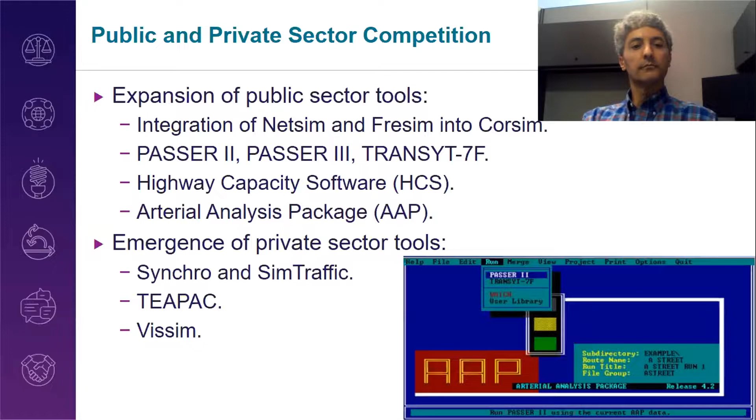All right, so the Highway Capacity Manual was quite a big deal in the 1990s. We started to see many research articles comparing HCM results to simulation results. And I recall it being a fairly big deal when the TRB Highway Capacity Committee updated its control delay equation based on research results involving thousands of NetSim simulation runs. And this was a big deal because the control delay equation was the primary determining factor for level of service, and level of service in turn was the primary determining factor for many of the important decisions made by agencies.

Therefore, simulation and capacity analysis sort of had a mutual impact on each other, and the comparisons between the two helped to improve the robustness of performance measures and equations and modeling approaches in both forms of tools, and essentially served as sort of an early form of multi-resolution modeling. Researchers began to notice that they could use vehicle trajectories to compare the results of multiple simulation tools, and to compute performance measures according to the published HCM definitions.

You had folks like Ken Courage and Rick Dowling who helped to publish an interesting chapter in the Highway Capacity Manual to help analysts understand what was under the hood of the performance measures they were seeing from the software tools.

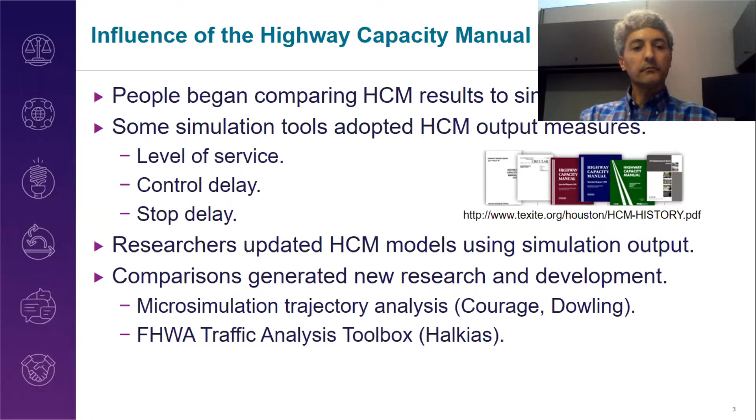I believe it was approximately the year 1995 when I attended a NetSim training course in South Florida with instructors such as Susan Walker and Ku Lee and Amar Kanan from Kaman Sciences. And I recall that Susan was the lead instructor, and she showed the trainees how to change the random number seed.

Most people have never heard of a random number seed. Then she showed how the results from the model would change after people changed the random number seed. And frankly, this caused grown adults and certified professional engineers who actually had decades of experience to sort of freak out a little bit. They were like, whoa, wait a minute. How can we even trust this model? Which model result is the correct result?

And so I think what Susan Walker did was she advised everyone to perform multiple runs, for example, 10 runs or so, and to just take the average of those results. And so that seems like a scientific data-driven approach is how they were trying to portray that. So I think the training course participants mostly got the point, but at the same time, I think everyone's faith in the model was sort of shaken because everyone was accustomed to the Highway Capacity Software and other deterministic tools that always would give one and only one true result.

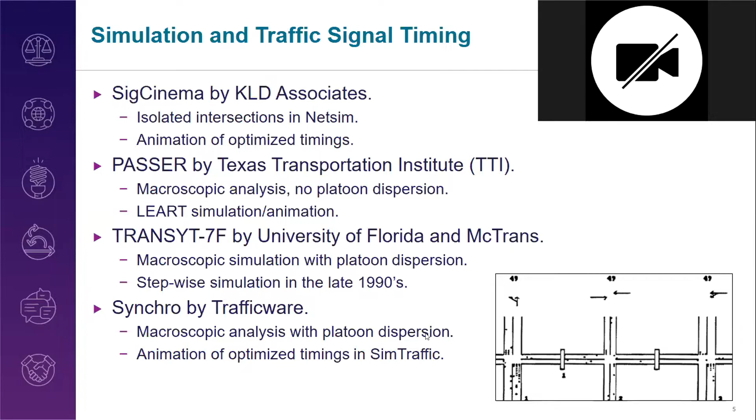All right, yeah, thanks. Go ahead, Tom Creasey. Yeah, without this sounding like a software advertisement, I just wanted to say that regarding the topic of regional microsimulation, that tool does exist. At least one exists right now and has been done, a regional microsimulation employing dynamic traffic assignment. We've done that with our TransModeler software, but that does exist now. And maybe Chris, that's a future demonstration topic.

Yeah, absolutely. So there's some really strong R&D going in multiple directions, and so people have got some great options to choose from. So I think it'll be real interesting to see what happens over the next 10 years and what becomes dominant, or if they become sort of equal options. But it's great that some companies are really putting some serious intensive development into that option. I think the user community can only benefit from having that kind of an option.

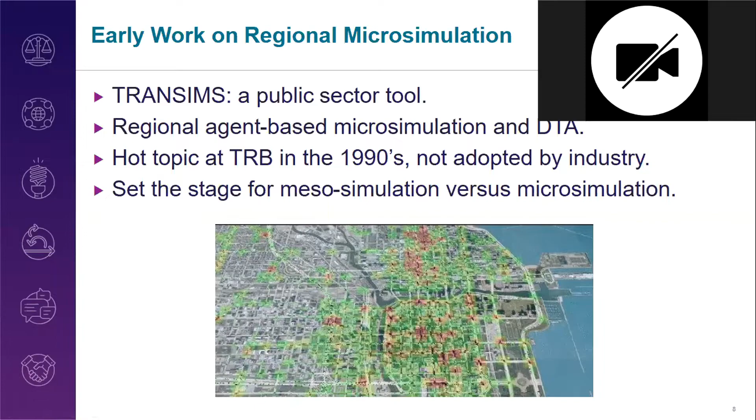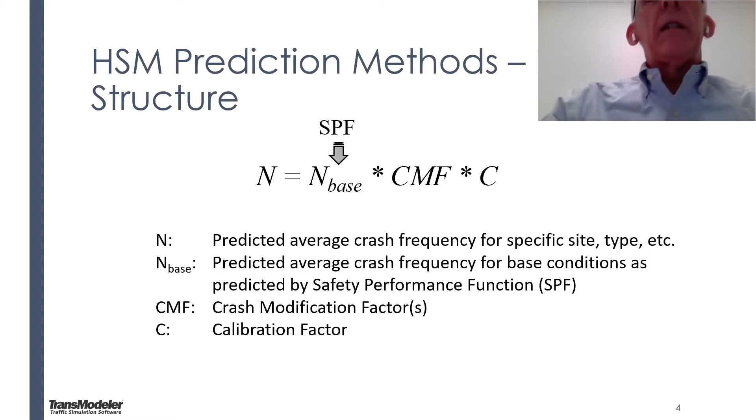And then this base number is adjusted by crash modification factors, which account for things like road width, presence or absence of a barrier, a number of different factors. And then also there's a calibration factor. You may think of it maybe as a fudge factor. And if the numbers don't quite agree with data that you have, agencies can have their own calibration factors. So that's the basic form of it.

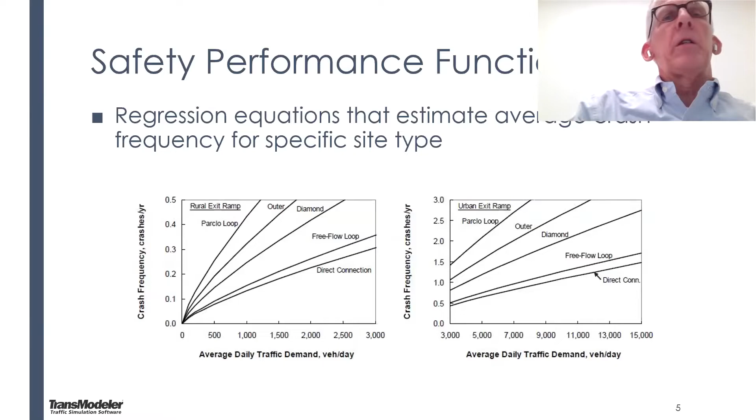These safety performance functions are typically regression equations based on data. And if you read through the HSM or even the research supporting that, you'll find a ton of these safety performance functions, but they're typically regression equations that estimate the average crash frequency for specific site types. So the methodology is basically that. It applies a safety performance function, then applies crash modification factors and calibration factors to predict this annual number of crashes. Then there's one more step, and that is, do you have historical crash data available?

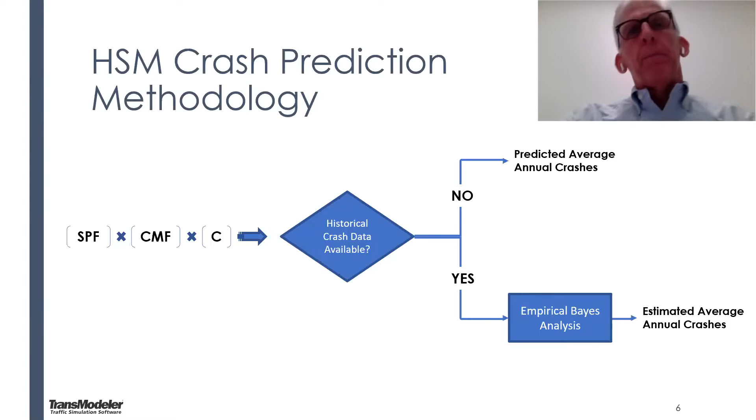If the answer to that question is no, then the result is just what they call predicted average annual crashes. If there are crash data available, then it takes it to another step and applies an empirical Bayes analysis, which is really a fancy way of saying a weighted average between the prediction that's made as a result of the safety performance function and the crash data to give you this estimated annual crashes. So basically what that means is you can refine your prediction if you have historical crash data to go into it.

So after the HSM was published, as you would expect, there were a few software tools that began to show up: IHSDM, McTrans's highway safety software, and some customized spreadsheets. So maybe some of you have had some experience with the Interactive Highway Safety Design Model, or IHSDM. If you have, you know that it was written in some very late 1990s looking Java code using this grid or tabular format, and included wonderful things like horizontal and vertical stationing for your roadway project. So you have to go to your design plans and actually get this centerline stationing.

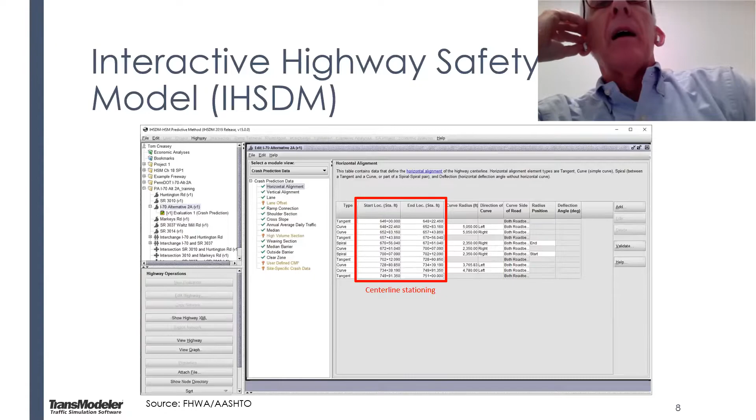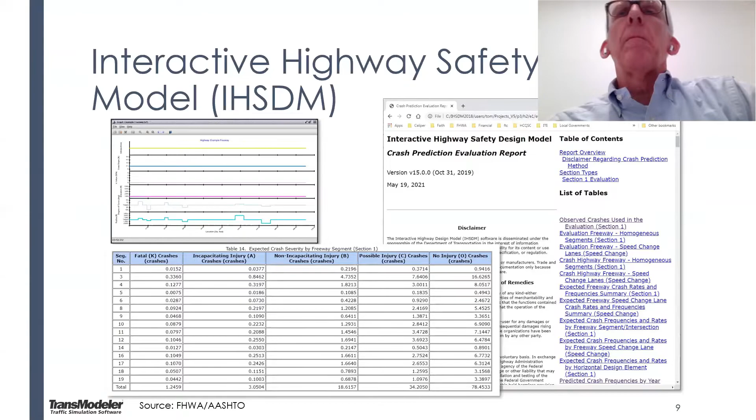Not terribly user-friendly, but functional. As you would expect for something like that, the graphics were also equally unimpressive. As you can see in this little picture here, the results are in an HTML type of table that you could use as it was, but if you wanted to do anything else with it, you had to copy and paste it into a spreadsheet. So again, functional, not terribly attractive or pleasing to the eye, but certainly it worked.

There's improvement to that through the highway safety software, which is bundled with HCS. But again, it's the same type of tabular format. The results certainly look better in the report, but again, some of the same constraints as if you used IHSDM.

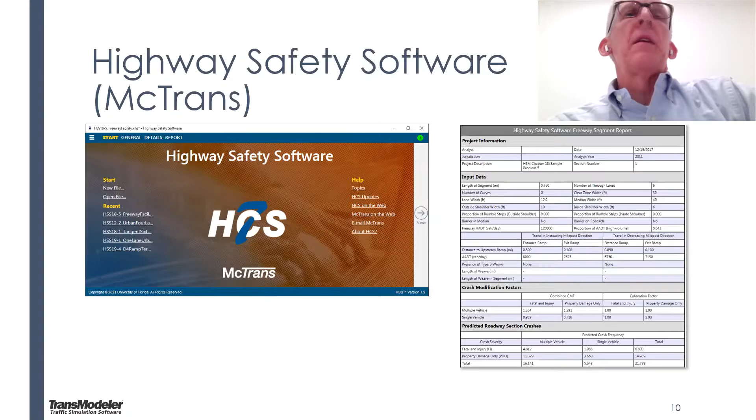And then AASHTO, that had produced the HSM, also produced some spreadsheets. Some states like Ohio took those spreadsheets and went to great lengths to customize those, and could do some other things like making some nice looking bar charts, stacked bar charts, and other things to go with that. But I think we've all had experience with spreadsheets to the point that they have lots of links in there and therefore opportunities for something to get broken and go wrong. So there's always the danger of that happening in using that type of tool.

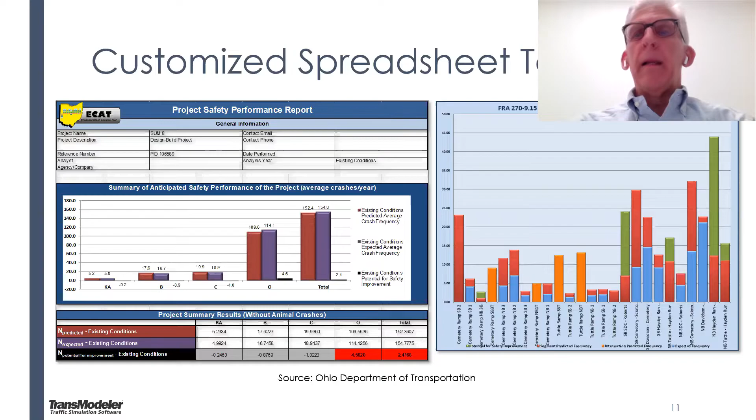So Ohio is one of the states that has committed to using our TransModeler simulation software and said, can you actually add these HSM methods to your simulation software? And we said, we'll go talk about it and we'll get back with you. And part of our discussion was, well, we've never really done this before. In fact, we don't know of anybody that's added safety prediction methods to simulation software.

Then the question is, within our software, what do we use and what do we not use? How much of the input should be auto-identified after the network is created, and what should we leave for the users to input? What should that user interface look like? How do we make it transparent enough so that agencies can customize it through things like calibration factors, severity distributions, or even maybe adding their own crash modification factors?

On the plus side of it, we definitely saw benefits of having one tool used for multiple purposes. So not only could you do simulation as part of project development, but also then use it for safety analysis. TransModeler is a GIS. So being able to take advantage of the GIS functionality that's built into the software already, particularly the roadway geometry in creating your network, but also taking advantage of other spatially referenced data that just about every state agency maintains now, things like where your guardrails are located, pavement surface type, road width, whatever.

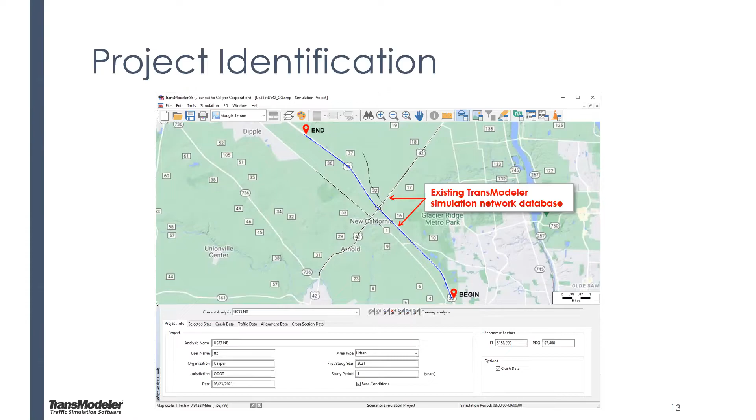Anywhere you have a network connection within TransModeler, you have a choice among several background maps. But it simply begins by selecting the beginning and the ending point of your section to be analyzed, and then from there putting it into a tabular form, and that's what you see here. So once the site has been selected, then it divides it up. This is a freeway segment, so dividing it up between basic segments and speed change lanes. And then every one of these pieces is a row in the table, if you will.

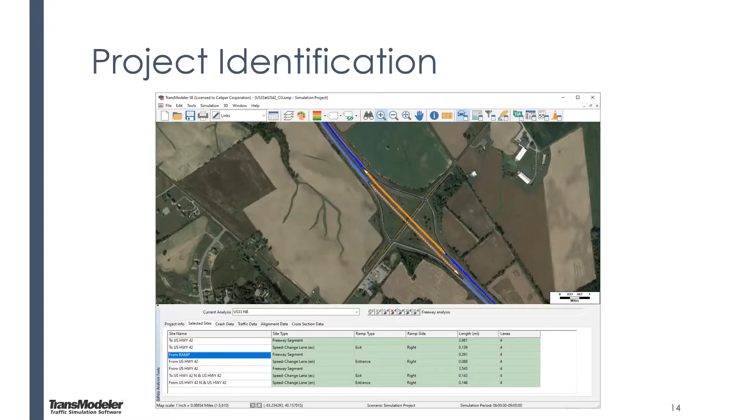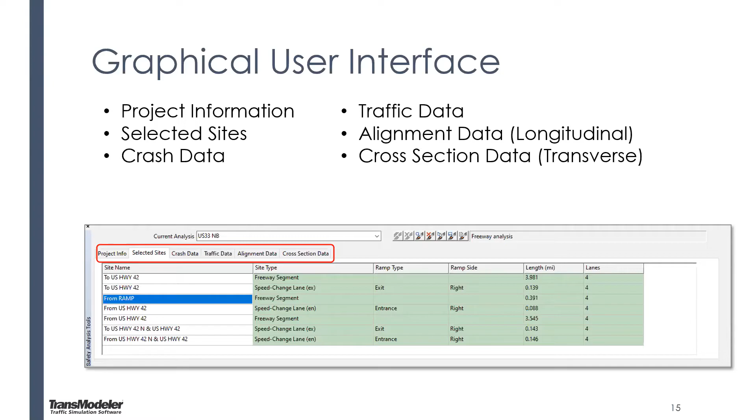We've shown the study direction with the solid line and the opposing direction for that segment using the dashed line. And then, as I talked about the importance of the user interface, simply creating a number of tabs for these different areas of data entry, such as crash data, traffic data, alignment data longitudinally along the section, or cross-section data, things like lane width and median width, presence or absence of a median barrier.

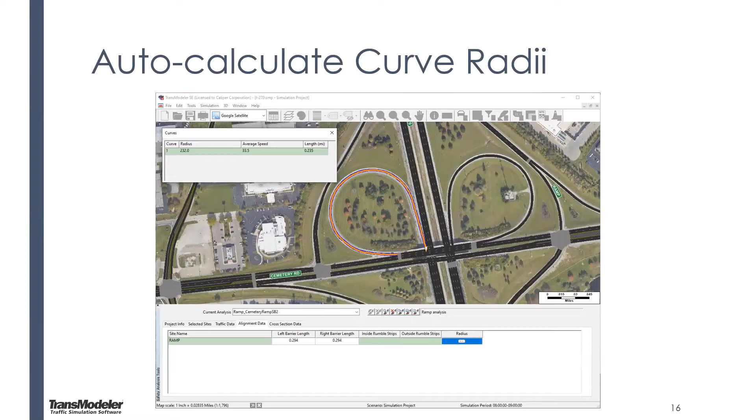For our ramp method, it will automatically calculate the radius of a curve instead of having to get some design plans and look up what that is. It'll automatically do that for you and then provide that as an input to your analysis.

And then I talked about agencies having other data available like guardrails or New Jersey barriers. Right now we just have it set up to use it as a reference point. We're in a GIS environment, so just bring that in as a GIS layer that you can have access to in creating your data set. But you can see in the table across the bottom that we've maintained that tabular format where each row in the table is a study segment. And then as you go across the row, you just populate it with different data elements.

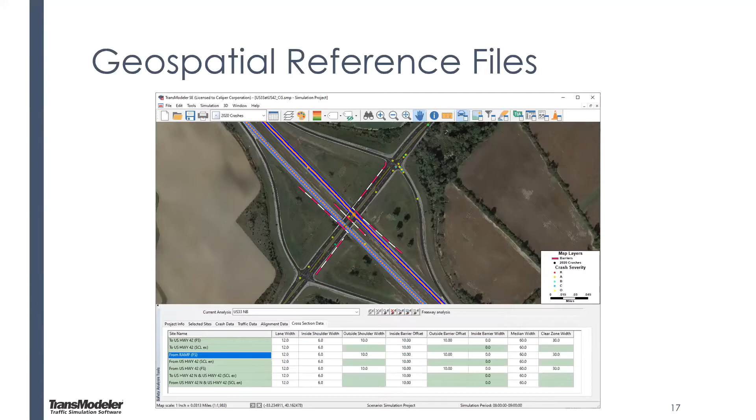So essentially how we've set it up to work is, again, utilizing the GIS functionality that's built in as part of the software and automatically identifying and segmenting these study sections, whether it's a freeway study section or a ramp, and then allowing the user to input the other variables through the GUI, performing the computations and then reporting the results.

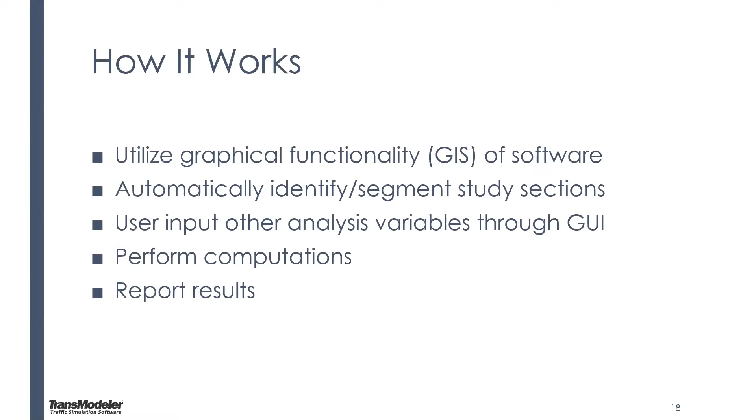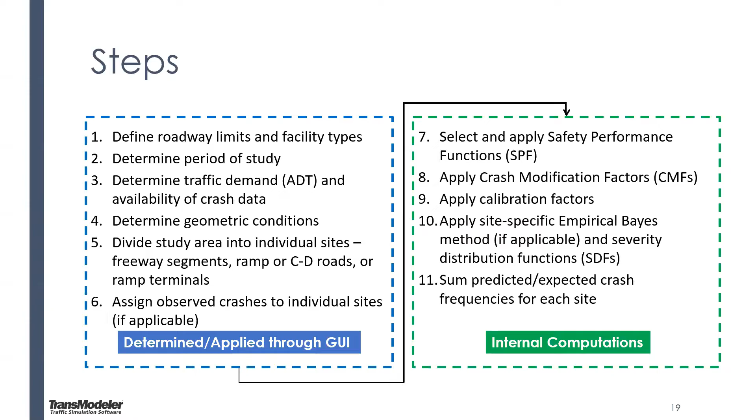So if you listed the steps and the methodology that are in the HSM, essentially the first half of the process is setting up your study site and entering the data, or allowing the software to enter some of the data for you, and then stepping through the methods and the steps 7 through 11.

In the end, it produces a report for each of these segments and for the number of years desired, the number of crashes, including fatal crashes, and then injury A, B, and C, and then property damage only. It also does the economic analysis for you based on some default values that you enter as part of the project information section. So it produces this in a table that you can use as is, or you can copy and paste it into a spreadsheet for something else.

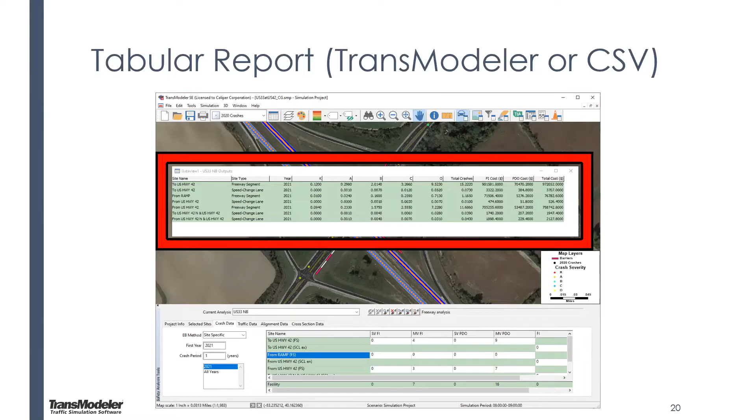We have left it transparent for certain agency customization functions as part of our parameters. In TransModeler it's very easy to find out where any number of modeling parameters are. You don't have to crack open code to do it. It's from a drop-down menu. Some of these are factors that agencies can simply go in and override if they have something that they want to use, things like these calibration factors that I talked about earlier.

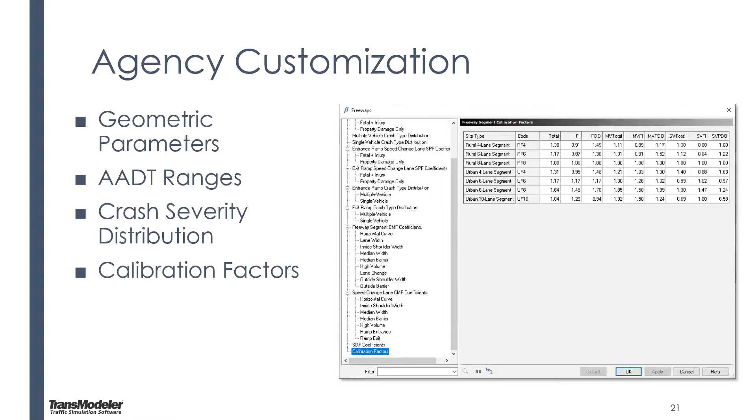Currently, we're still in a testing mode on this, even though it is in the software, but there's a special key that you have to turn it on. We've done this for the freeways, which is chapter 18, and for ramps, which is chapter 19, which includes the ramp terminal intersections. So it's being beta tested by the Ohio DOT who we did the work for.

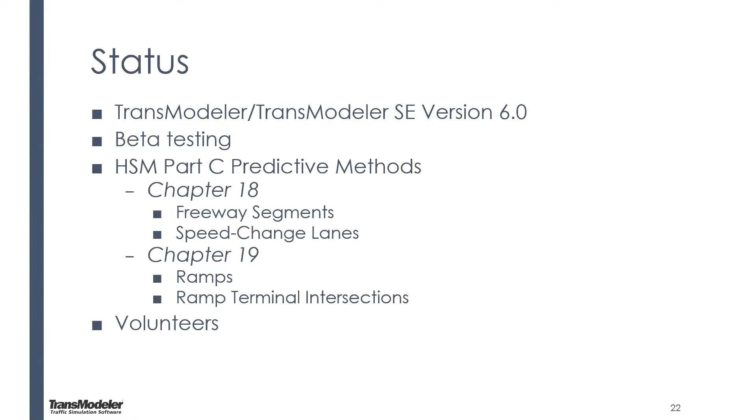For other people that might be interested in this, again, it's a safety analysis where you already have some data to use. We'd certainly be interested if you want to be a volunteer for this, in getting some additional feedback. Since I've been in the software business for about 3 years now, I've learned really the importance of beta testing, and you just can't test enough. So we're certainly open if anybody else wants to volunteer for that. We can get you set up.

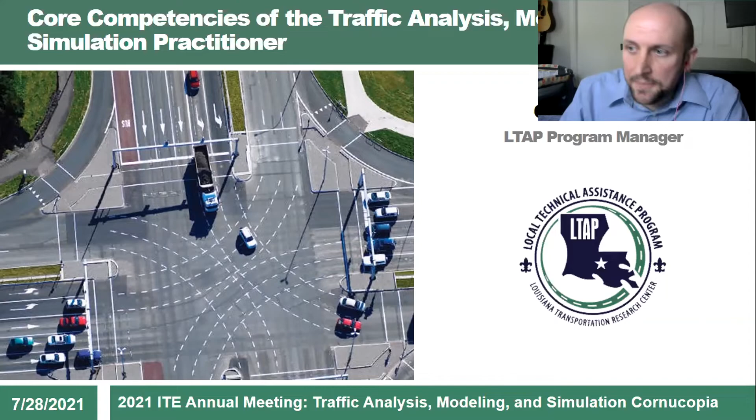This is actually going to be my presentation at the ITE annual meeting coming up in a couple of weeks. And this was an idea that I've had for a while. I think other fields have this, and it's really defining a national set of core competencies focused on the traffic analysis, modeling, and simulation practitioner. And so why is that important to develop a national set of core competencies?

There's several reasons. One, it can provide a foundational structure, which you can do a lot of things with. You can start tying resources to specific competencies, and then you can see if there is a gap in resources, or a gap in training, for example. Of course, there's national guidance on developing simulation models. This one is from the FHWA TAT Volume 3, this little screenshot. There's also the anticipated Transportation System Simulation Manual.

But these go basically hand in hand, where these national guidances show you the processes and methods used to develop models for decision making. And the core set of competencies is really what competencies, knowledge, and skills are needed to actually successfully do those processes. So they do go hand in hand as well.

Another potential benefit is to inform educational curriculum. If you see, for example, a competency that would be informed by civil engineering curriculum, but there is a gap in the current knowledge, maybe that's something to think about and maybe add to the core curriculum.

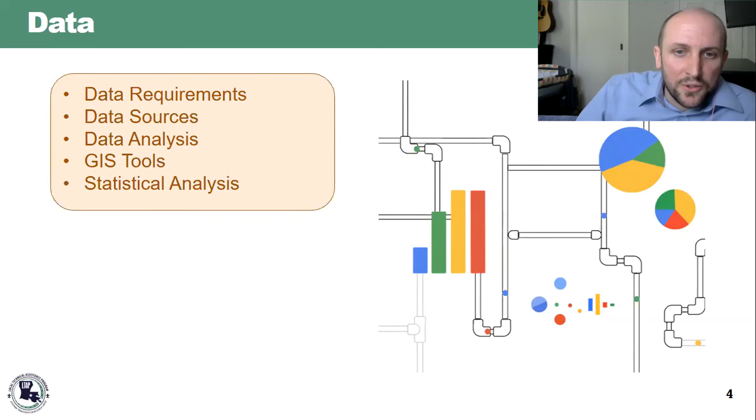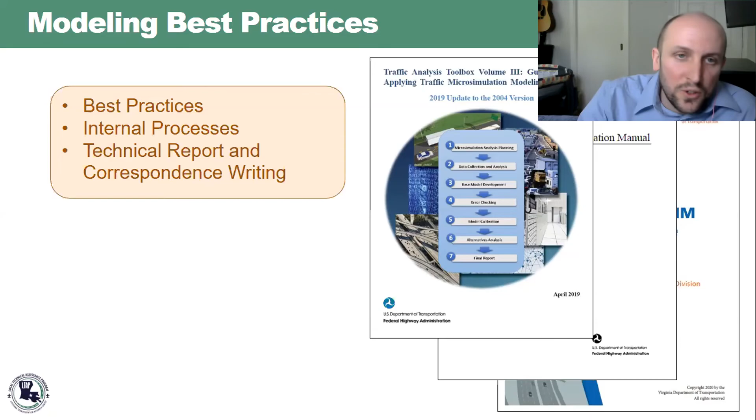I also put here, I didn't really know where to put this, but it's important: technical report and correspondence writing. It's the ability to summarize the model results comprehensively, including the visualization options, and the general ability to convey technical information in the report and to the roadway owner. I debated whether to include it and thought this was the best place.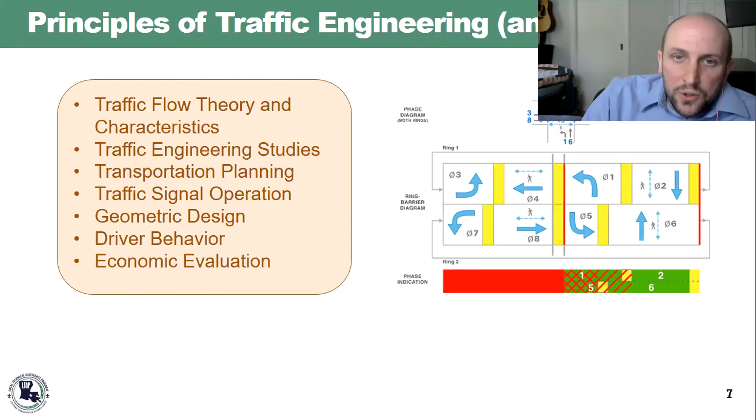Then I also included here driver behavior, since fundamentally the traffic simulation models are built off of driver behavior theory. For example, this is the one that VISSIM is built from. And so understanding that and being able to apply that to verify model output, if it's actually accurately being represented based off of this driver behavior theory and fundamentals.

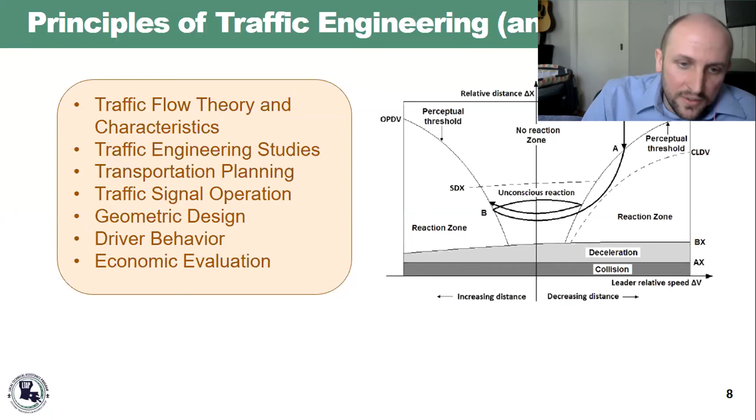And then I have here economic evaluation, to apply that to the model results, like a benefit cost analysis. I have modeling software here. I didn't actually put any specific modeling software, so that's going to be dependent on the application, and also the preference of the roadway owner.

For example, in the traffic engineering section of the DOTD, they specify specific software that they have the practitioners use. So this is something that the agency-specific person can use, pulling from the core and then putting in their own specific software, for example.

Lastly, these are the applications. Again, the idea I'm trying to portray here is that the modeler needs to have some foundational information about the application that is being modeled, whether that's ITS or emerging technology, just to ensure that that's actually being reasonably represented in the model. And these are the main ones that I see.

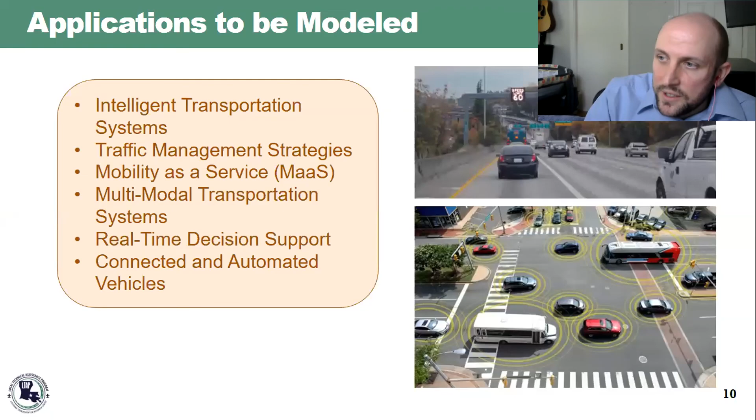Again, this is about traffic. So there are traffic operation strategies, ITS strategies, traffic management strategies, etc. I would definitely appreciate it if you could take this; it will probably take about 3 to 5 minutes. Essentially, I built a survey that goes over the exact same thing that I presented and asks you to rate the importance of including that core competency in the national set. It's on a 5-point scale from no importance to high importance.

Also, there's the ability in that survey to modify these core competencies, and to add something if you feel that something is missing. So I would appreciate it if you all could fill out that survey. Again, the idea is just to present something to get feedback on.

Hey, Chris, it's Dave Petrucci. I do have a quick question. A long time ago, I remember in the Traffic Engineering Council at ITE, when SimCap was just getting started, people talked about the idea of a certification related to analysis. Has that come up in the past few years, and is that a conversation that should be had? I'm just curious.

Thanks for bringing that up. In terms of the SimCap activities, I think Eric Trippi already left, but that hasn't really been brought up. It actually has been brought up in other venues, though. For example, Mohammed Hadi brought that up a couple of times during his TRB activities. So I don't know if it's an initiative that people are pushing right now, but I don't think it's been forgotten and it can definitely be revisited.